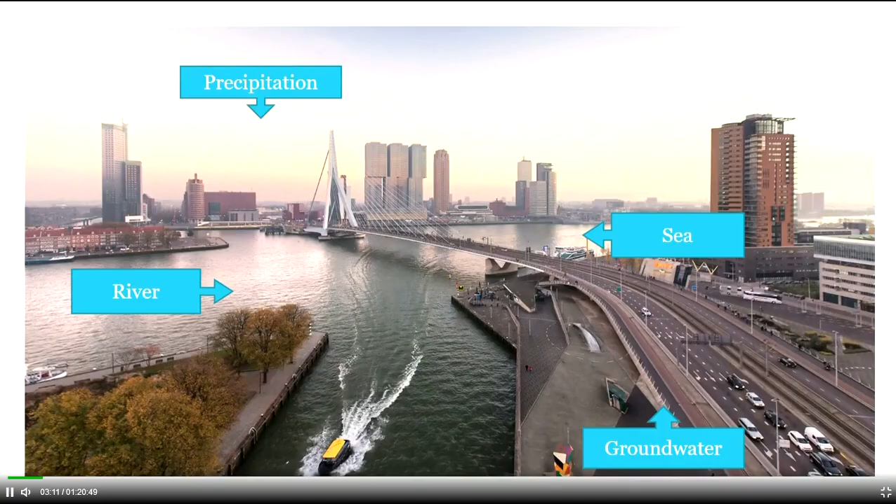Flooding in Rotterdam. Yes, we are a delta city. We live right next to the river, right next to the sea. So water is a real challenge for us as a city because water comes from four sides. We have the river flowing to our city, and when snow starts to melt in other countries, the water will eventually flow through our city. So we see rising river levels, and even areas of the city that flood maybe once or twice a year. And the people like it so much living next to the water that they even accept things like that.

Then the sea - well, luckily we have a storm surge barrier in the west, the Maeslantkering. When that closes off, the city is totally protected from the sea, at least for now. Groundwater can be a challenge too, so low groundwater tables during periods of drought, and we have those old homes founded on wooden poles - those poles rot and the house will shift. Or higher groundwater tables when your basements will flood, and a lot of the basements in Rotterdam are transformed into bedrooms and kitchens.

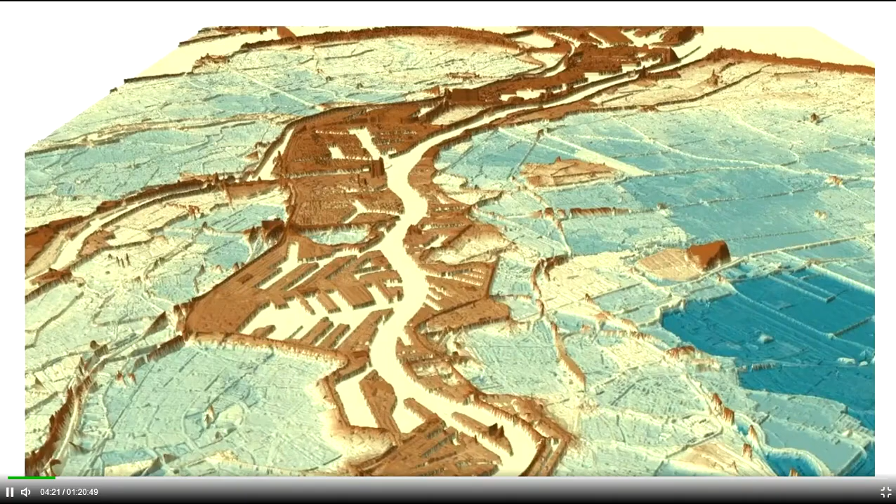You don't want that. Precipitation, rainfall, is a real challenge for our city. And it was already said this morning, 85% of our city is below sea level. So everything that's blue here is below the level of the river. We have quite a good drainage system and around 1,100 pumping stations to keep our city dry. But we see with climate change and high intensity rainfall that our sewage system cannot cope with that amount of water. So we have to do something to our city.

I already showed you this in the heat session - we used to be a water city, so there was quite a good surface water drainage system, but the city council decided to transform Rotterdam into a car city. Hence a lot of the former canals - this was actually a canal, called Goudse Singel, and Singel is the Dutch word for canal. From a heat perspective this is not good, but from a water perspective this is also not good. It's totally paved, every drop of water that falls here goes to our sewage system. The sewage system cannot cope with the water, hence water on the street.

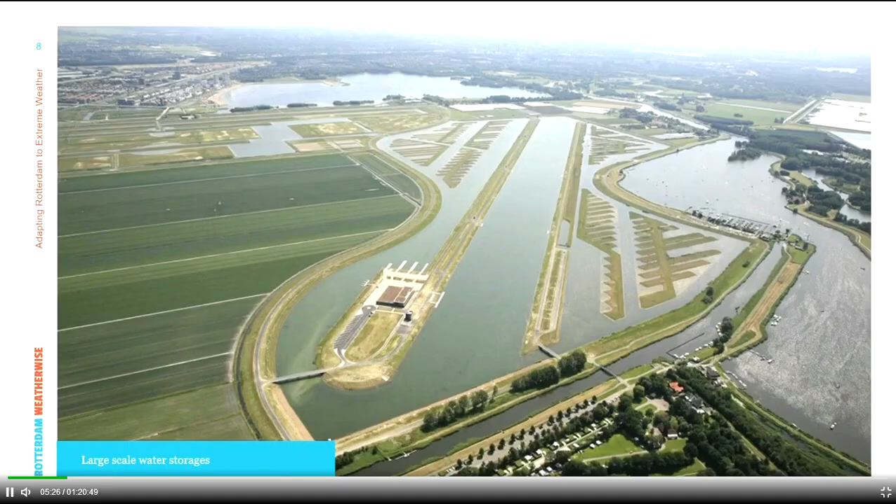So we have to work towards a climate adaptive city and really integrate climate adaptation into our urban planning. Let me give you some examples of that. It's about large-scale solutions - and this is problematic in a densely built city - large-scale solutions and multifunctionality. What you see here is a big water retention reservoir, but it also doubles up as an Olympic rowing track, so it can be used for rowing competitions.

And it actually helps in improving the retention capacity of our polder system, but it's outside the boundaries of the city of Rotterdam. We don't have space to do things like this, so we invest as a city in solutions that help keep our city dry, even if it's outside the boundaries.

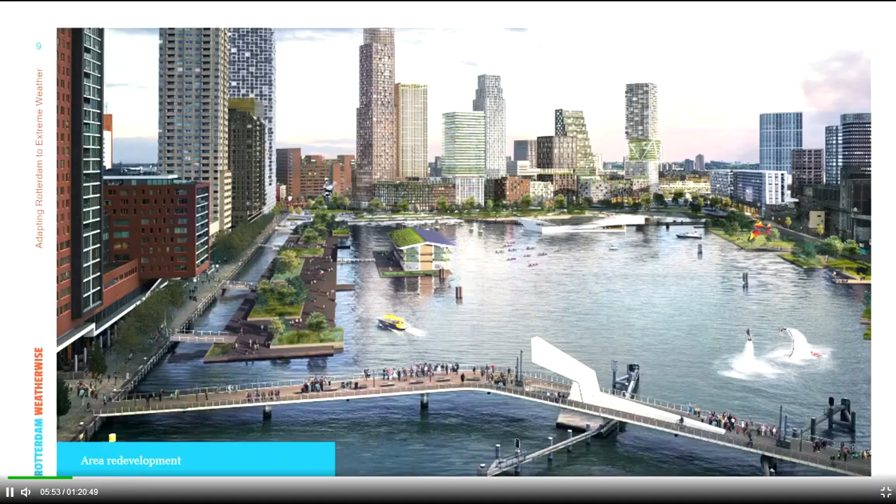Also, area redevelopments. We have a lot of former port areas in the city, and the ports gradually moved towards the sea, leaving unused port areas. This is Rijnhaven, and in the middle is the floating office of the Global Center on Adaptation. It will be transformed into a tidal park, increasing the recreational value of the area. It's also quite interesting for real estate developers to develop there, but it also helps in flood-proofing the city, so it has this multifunctionality in mind.

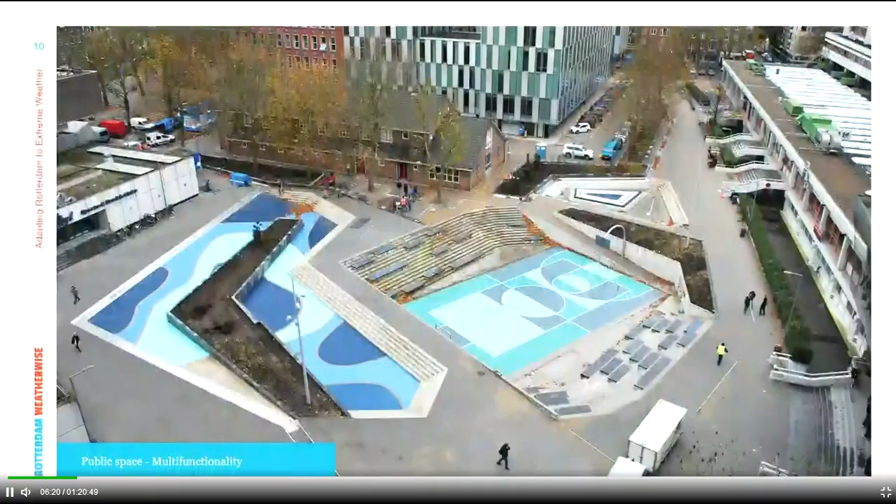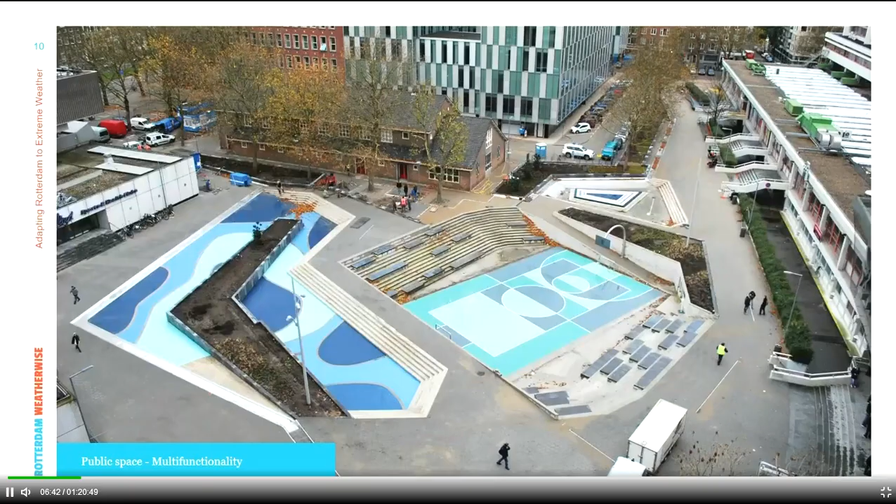And also on a small space, this is the water square. There was the first one, it's already 10 years old, but we have a lot of these all around our city. They all look completely different because we always design them together with the citizens. So they serve the purpose of water retention, and at the same time can be used for sports and theater. On this one, there's even a church that does services in the big reservoir on a sunny Sunday, but at the same time, 1.7 million liters of water can be stored here.

One thing we try to do is link in with everything that's happening in the city, and a big opportunity for us is sewage renewal. Rotterdam is built on sloppy soil. We have 2,400 kilometers of sewage pipe which keep the city dry. This is really the core of a robust system.

But the pipes, they just sink, so we have to renew them every 60 years. We renew 40 kilometers of sewage pipe every year, so we also open up 40 kilometers of roads every year.

So there's a huge opportunity to do a lot of this in the city in the next few years. And obviously you cannot give up every road, so it's always looking at what's possible here, but also inviting citizens in an early stage, before we even have a project, to think with us about what they like and what kind of solutions they want. So it's not the traditional way of the city knowing what's good for the citizens, but together the city, and maybe even the private sector and the citizens, know what's good for their streets.

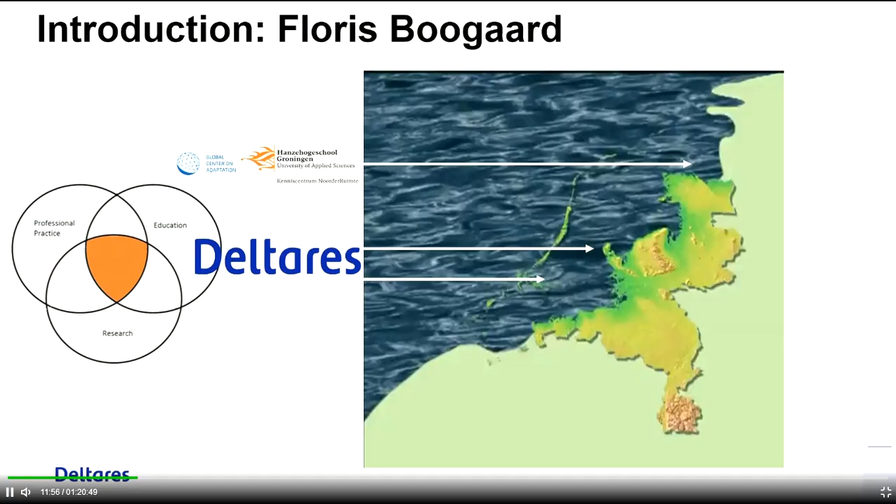I work at Deltares as a consultant, being a professor in Groningen, and also, one of the pictures that Johan showed, I also work as affiliated researcher at the Global Center on Adaptation, which is in Rotterdam and Groningen actually. Next slide. If the dikes would break, you probably know Netherlands is below sea level, I might have to move to Dubai, as you can see here. So water is a real focus in my work.

Next slide. What I want to talk to you about in this very short presentation is a strategy for integral flooding solutions. And of course, we have a lot of challenges, we have a lot of solutions that we can share. I think a major strategy would be to analyze the problems and the solutions, form an ambition, and then as soon as possible come to action.

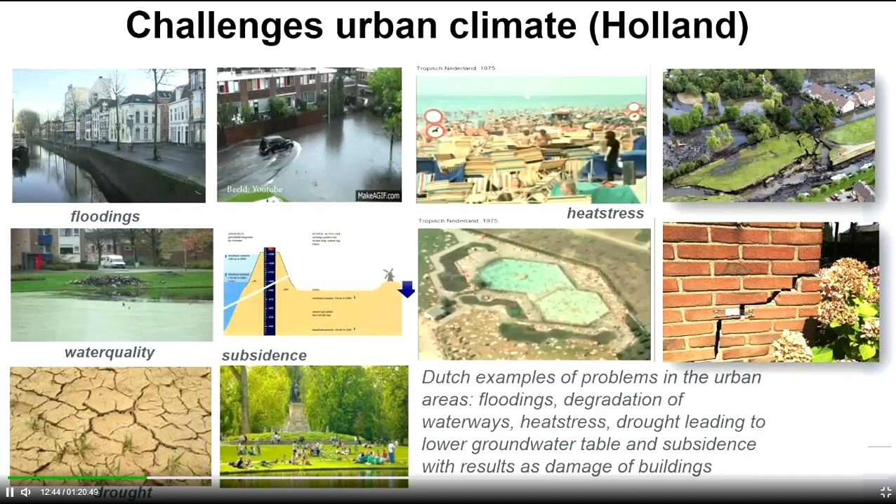Next slide. Just to show you some of the challenges that we face, Johan already named them, so I'll go quickly over them. Of course, it's about flooding in this section, but if you cope with floodings you will also do an integrated approach, tackling heat stress or drought or subsidence, being sinking cities, for example. It also has a very large effect on water quality, air quality, urbanization, more paved areas in the city that we have to solve. So next slide.

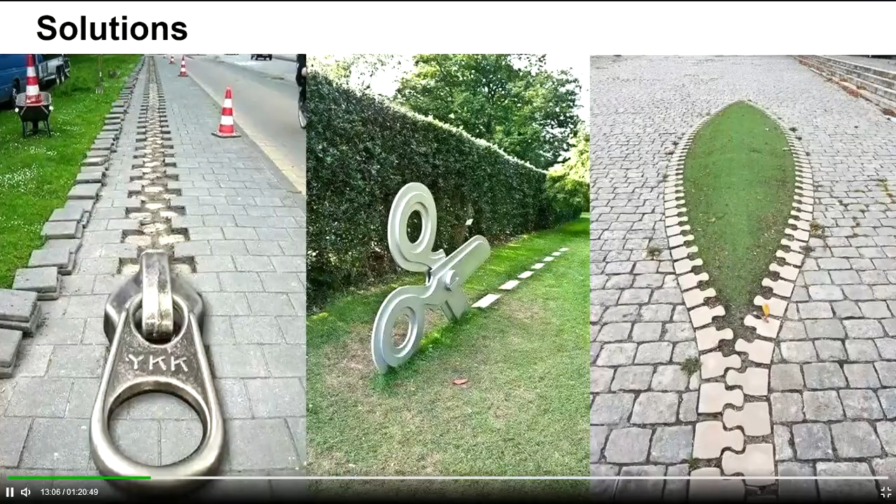I think these artists visualized well what we have to do. We have to open up the cities again and give more room for water where it can be stored and slowly infiltrate into the ground. So we tackle floodings, also drought, and heat stress in a lot of situations. Next slide.

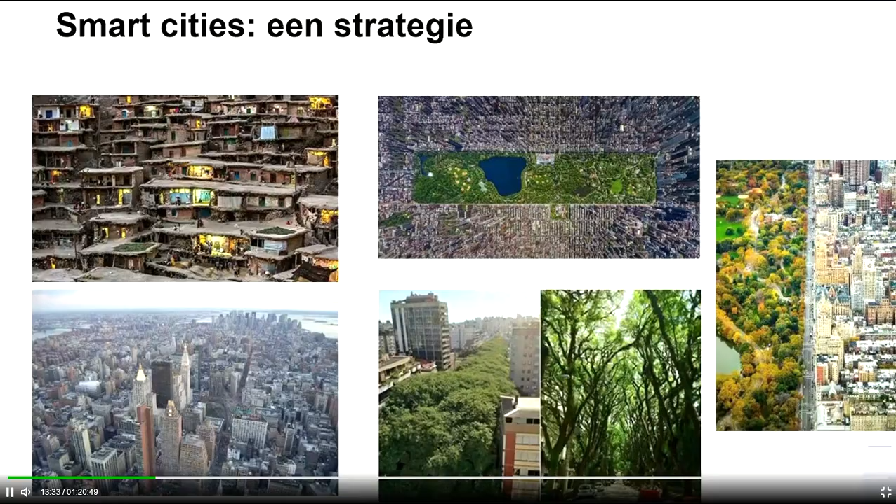You will see that cities were not planned that smart in the old days, as Johan referred to as well. We tend to give green less space, or put it in just one space, as you can see here. Gray and green are really separated in this case. So one of the challenges is really to take an integrated approach and see how we combine them.

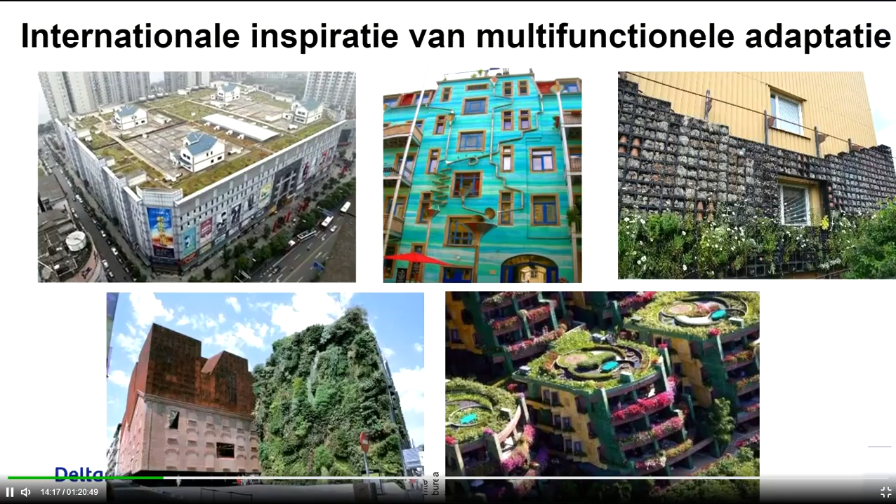Next slide. There are some great solutions all around the world, as you can see here. Rooftops in China, autarkic homes in Thailand that are really self-sustainable, a very nice green wall, one of the biggest in Europe, in Spain, for example. Maybe one of my favorites is the one in the middle: musical instruments in a building in Dresden. When it rains, it makes music, and every time it rains it makes a different symphony, so to say, and people go out in the rain and record the noise that it makes. So it should reach participation and stakeholders in this case as well.

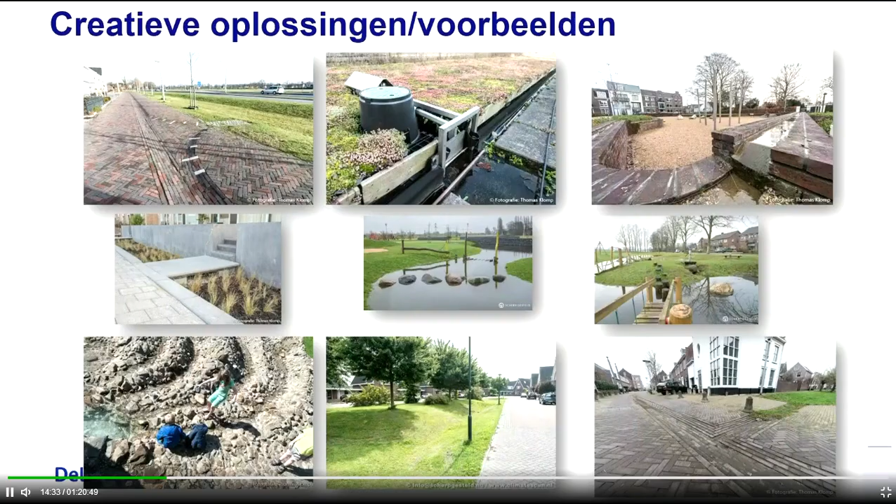Next slide. So there are a lot of solutions that you can find: swales, rain gardens, water squares, permeable pavement. Those are all small-scale solutions that you can implement in the urban area.

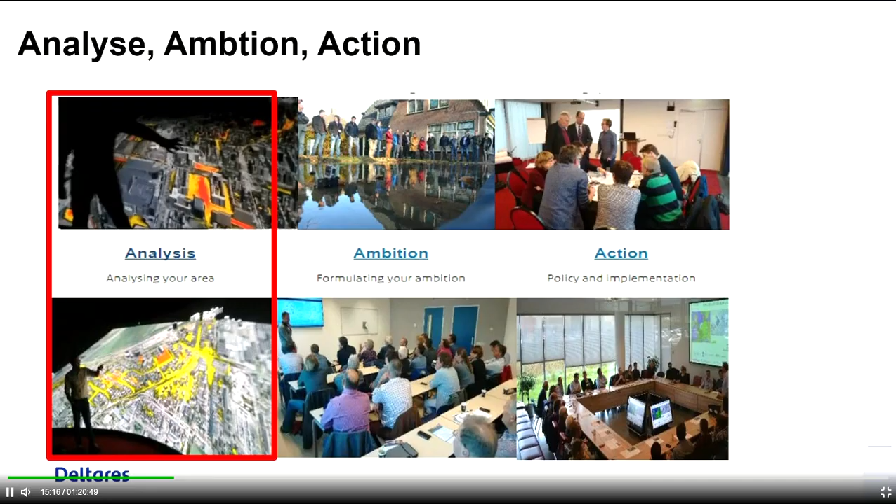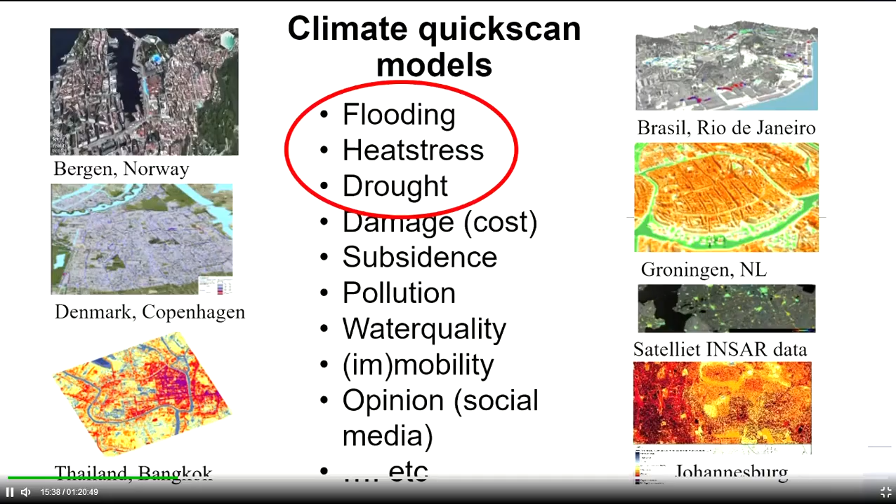I will show you in the next slide. You have an ambition, and then you also should go to action. Here's some climate quick scan models. It doesn't have to be exact, most people already know where the problems are.

It's not only technical, it's also about the opinion. Social media can be modeled as well, so you can see what the perception is of people and combine that in a technical structure. That's mostly an integrated approach.

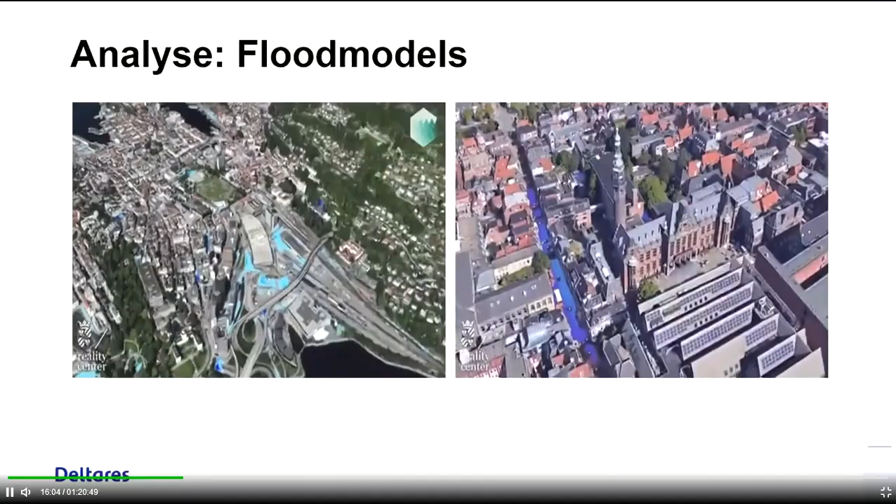Here are some 3D visualizations of how you can relate to people. You can fly through cities and see where the problems are, so they relate to the problem and are more willing to give a solution to that.

It's always good to give an example. Copenhagen is a well-known example. In 2011, there was 150 millimeters in 2 hours on that city, causing a billion of damage. It's quite a best management practice now, because they came to action quite soon.

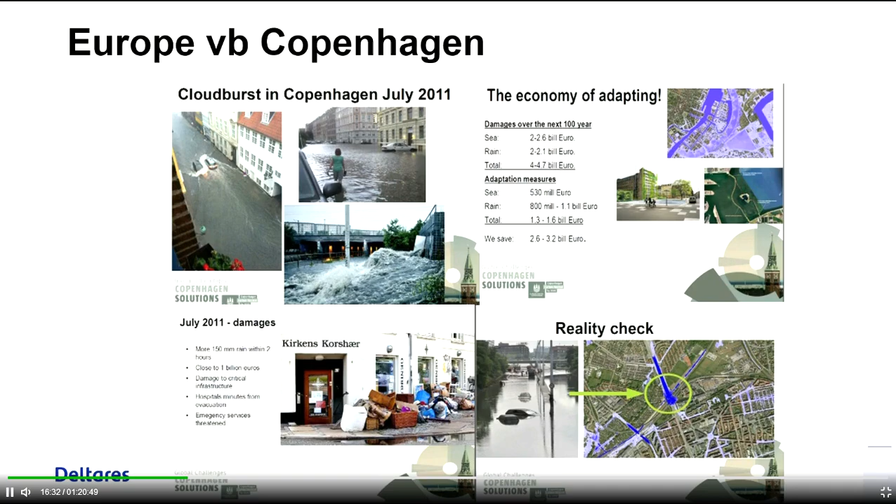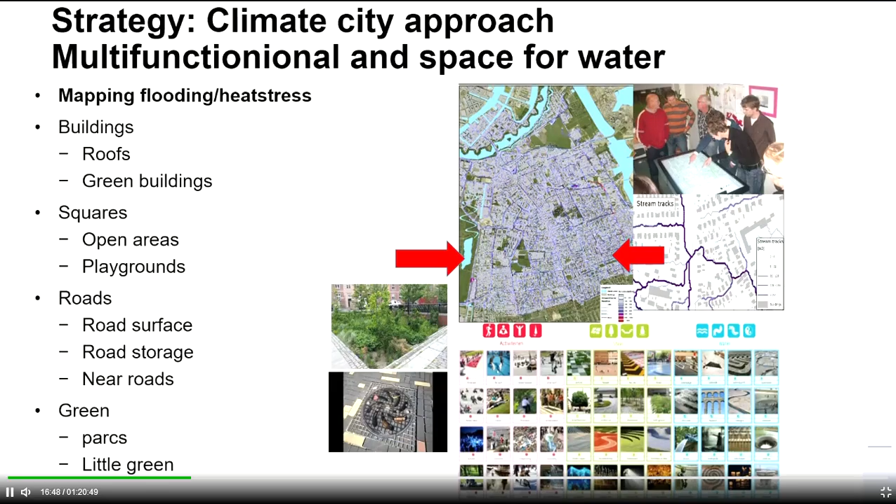I did some flood modeling there, as you could see the models before, and it's basically a puzzle to see where your buildings are, where's the green, where are the squares, where can you make water squares, as Johan was talking about, or other features to fit into the city. You can make it into a fun game, so to say.

There are a lot more solutions. Here's some things in Dutch text, because they're Dutch, so maybe it's an inspiration as well. It's really greening cities, and I collect them in a tool that I will show you later, and you can maybe use that.

It's very important to know that you can implement them, you can design, you see great pictures of it, but it also has to work in the long term. Maybe 60 years, as Johan was talking about, for roads, but some municipalities have 20 or 40-year cycles. It has to be functioning, have hydraulic capacity, but also people have to like it in the area.

All these guidelines and lessons learned from these projects you can find on adaptation platforms, and platforms are of course location specific. Here you see a lot of QR codes all around the world of platforms you could use to find information about what works, what doesn't work, the lessons learned I'm talking about.

Just to give you one example of that is ClimateScan. In this book, there are a lot of platforms you could use. Climatescan.org ticks a lot of boxes, so you can use it yourself to share your solutions, and also to find specific solutions in Rotterdam, or every city around the world.

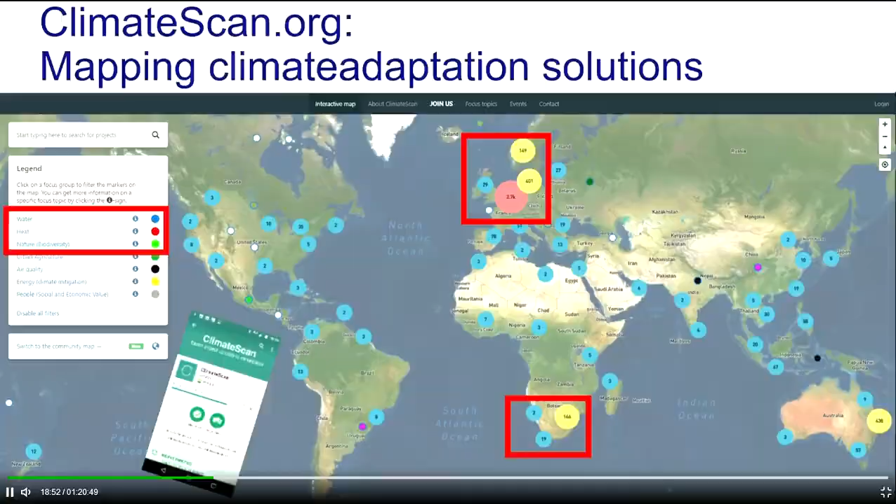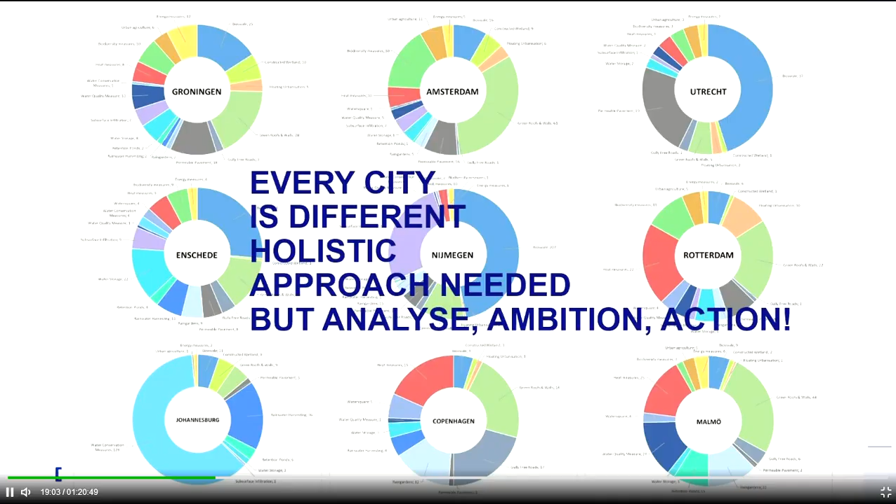With this, you can find the DNA of cities, because no city in the world is the same. So it needs a holistic approach, an integral flooding approach. In these pictures, also Rotterdam is there, but a lot of other cities like Johannesburg or Malmo or Copenhagen, you can see what the DNA of a city is.

Sometimes a green roof works, or sometimes more bioswales, or Wadi, as Johan called them, which is actually an Arabic name, so probably a lot of you are familiar with it. With the DNA of these cities, you can find your own strategy, which makes it difficult as well.

If you follow the strategy of analyzing, form your ambition, see what kind of cost, governance, or space you have to implement these measures, and then come directly to action and learn from it back, as you saw in those tools. So basically that's my message.

I hope this has been helpful, that you can use the tools, that you can share that knowledge. I hope that Deltares could help you out with all the challenges that we have around the world. Thank you so much.

Thank you, Professor Floris. Indeed, it's nice to learn how we can, as countries, learn from each other, how each country deals with the flooding. So it's a good presentation.

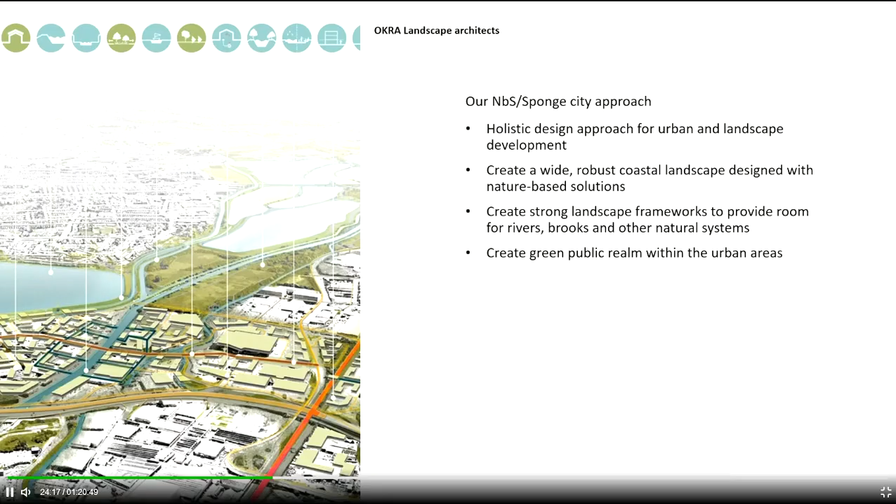Then gradually we started working on the green and blue structure, defining it with typologies, so the blue typologies could also be part of the green areas, but also linked to the urban areas—so that if you provide urban spaces, they are connected to the water system, and the sponge works not just in the urban area, but in the green areas as well.

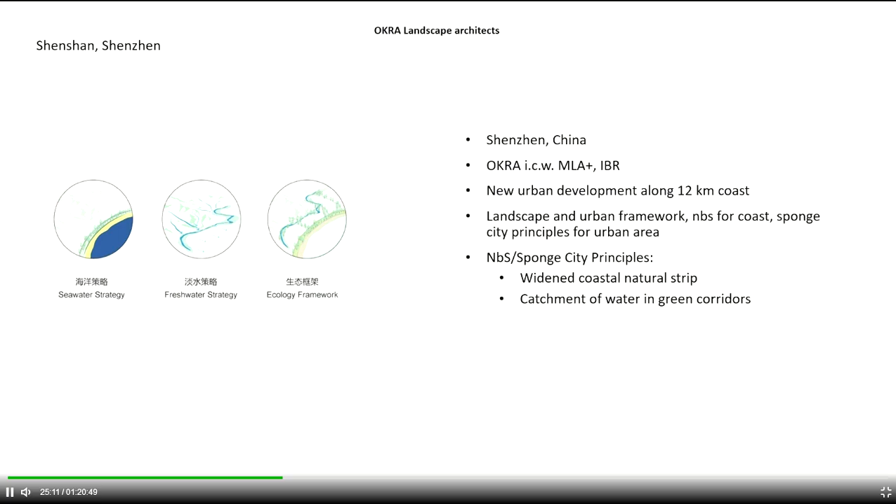For the coast, it was important to create this robust landscape that is so strong that maybe sometimes it can lose some of its dimension, and sometimes it can gain extra space, because the sea also sometimes gives instead of taking. It should also provide room for ecology and recreation, so it becomes multifunctional.

The wider you make it, the stronger and more robust it will be, but also the more meaning it gives to people. So that was the first asset, which creates various cities—a pearl necklace of cities instead of just one big city along the water. Here you can see landscape and urbanity are integrated, bringing a new future for cities.

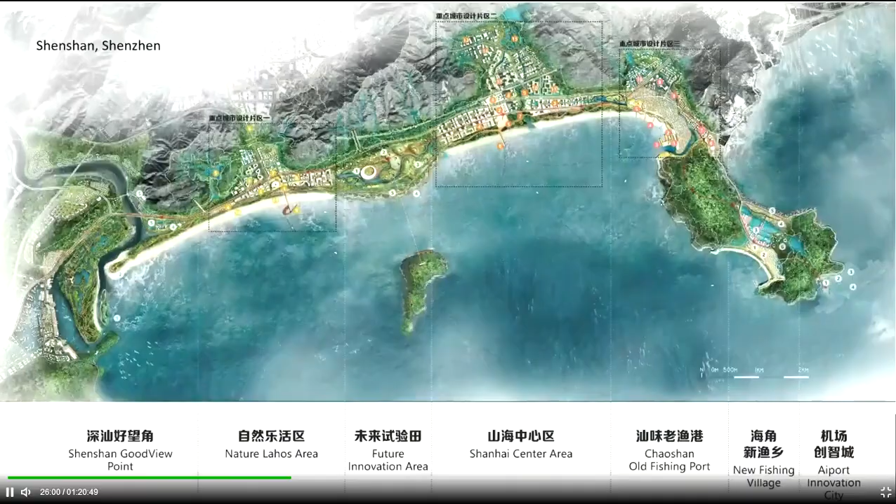The next project that I would like to show is the London project. We're now moving to London—Meridian Water.

That's one of the largest building locations in London along the River Lee, which is a side river of the River Thames, the most well-known river in London, of course.

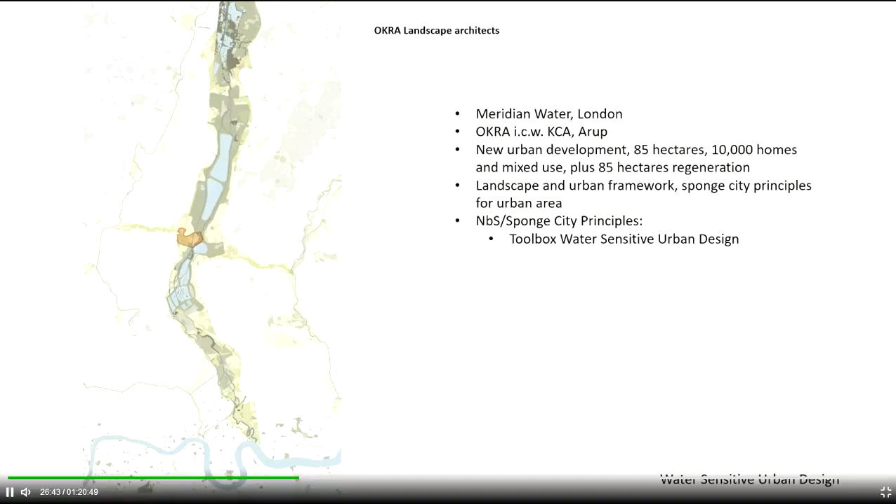And since the city is actually expanding, they are in need of creating a lot of housing. In our view, you should combine green with housing. So the number of housing is very high, but you should still create for sponge city principles and create what we call a toolbox of water-sensitive design.

That's crucial, we think, to tackle the new needs for the city. In fact, the city is also changing since they created Crossrail, which is a super infrastructure rail system. These locations at the outskirts of the city become closer to the city and will be there in 15 minutes from the city center.

And again, we say, start a holistic approach and define the tools for water catchment, water storage, reuse of water, and water in public realm prior to urbanization. And of course, there was the urbanization program of 10,000 homes on 85 hectares. There was also the program of creating a better space for residential areas adjacent to it.

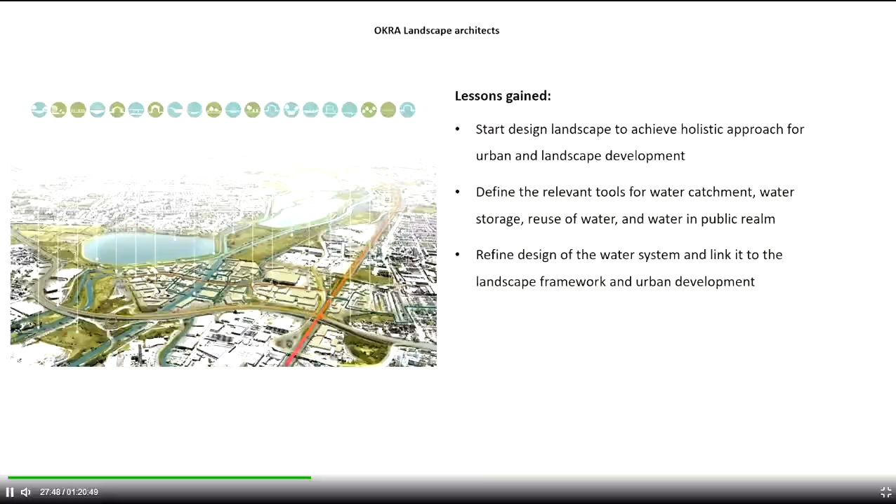But we said, well, please start with the green. And they accepted this proposal and said, okay, yes, we're going to link it to landscape framework and urban development. To do so, we have defined some tools, and you could say that if you provide tools, you can have them in 4 categories.

The first one is, please do something upstream. If you capture the water problem upstream, you prevent the area from flooding if there's a problem on the higher parts of the river. Then secondly, you need to provide a good area that you're not causing problems downstream.

So within the urban area, you should have several tools to capture the water, to store it, to filter it, and bring it in small doses to the river.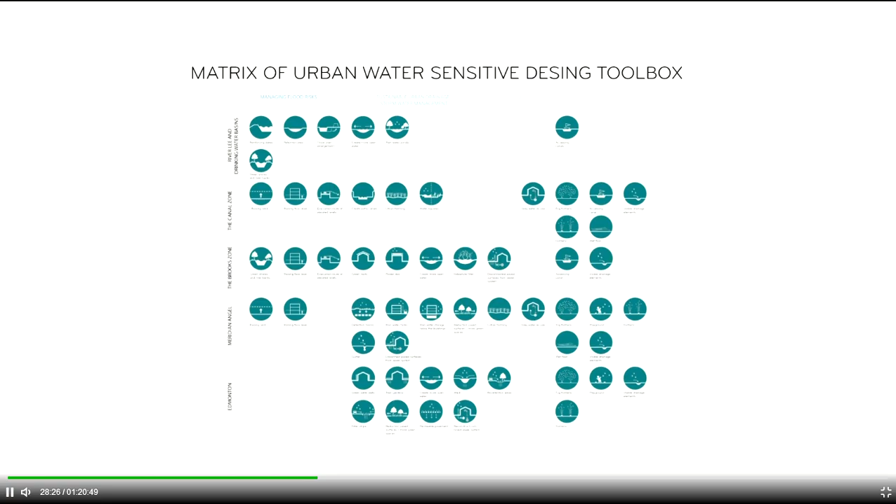The third category is thinking about recycling and water quality. We are of course always thinking about quantities, but in urban areas quality is as important as quantity. If there's polluted water, it affects the groundwater table, and in all metropolitan areas, water supply for drinking water is already at stake, and if you don't do the right things, it's also a bit in danger.

And the last category, I would also say, make water visible in the urban areas. So make it a pleasure.

So we designed some sections and showed how these tools could be applied in a design way. Otherwise, it becomes technical. And of course, technically, you can solve everything. But if you want to have people's awareness, you should design it as well.

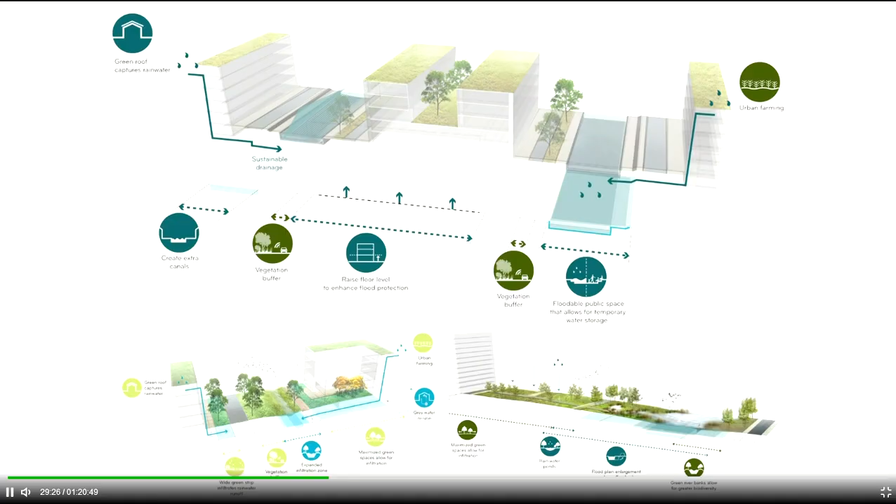So some more pictures of how that works are the next ones. And we have worked on the first area. This is a development area that is actually the starting development.

We said also, even in phasing, you can do this. So if you start developing, maybe first you should make green nurseries for trees, and maybe you should create already the green structure prior to building.

The last project here again shows some images of how that works on the small scale, and how the tools are connected to the map.

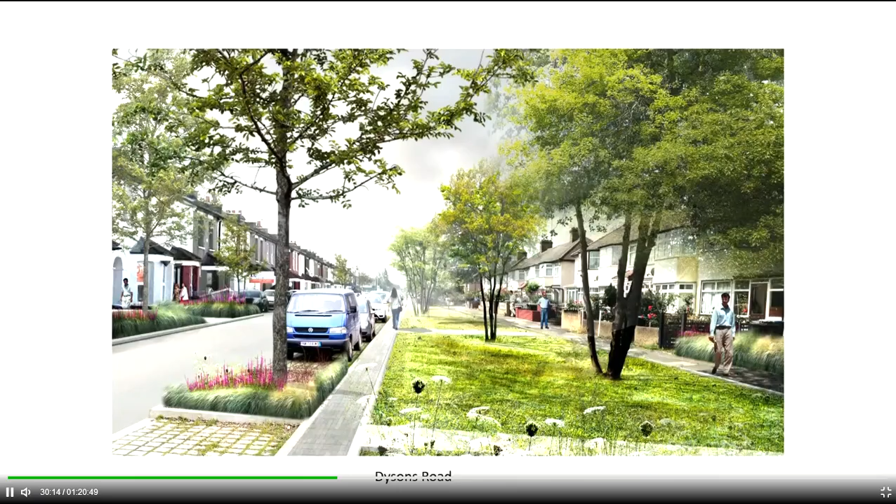You could see that it gradually works down to the small scales, and in the end you see this bioswale in the neighborhood, in a residential area.

But it all comes together to work with the big scale and the smaller scale, starting from the green framework and then gradually bringing it down to the human scale, and in the end, the eye-level perspective, so that people living there can understand what we mean with all these abstract tools and diagrams.

Yeah, the last project I would bring forward is a project in the Netherlands, Kustwerk Katwijk. It is about sea defense and coastal town economy.

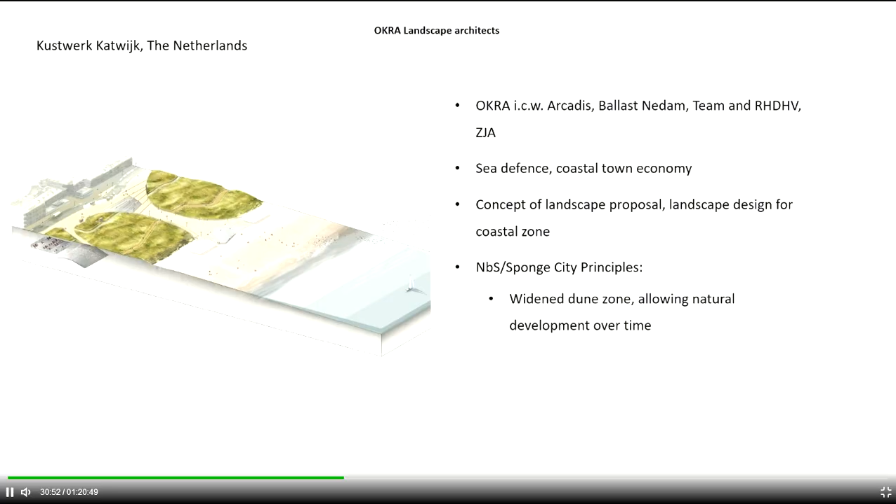In fact, what we can learn from this one is that, again, a holistic approach is required. Before we started here, the engineering solution was at the table, and the engineer said, you can make a big dike in front of the coastal town, and then it will be protected.

Of course it will be protected, but all the inhabitants were really angry. They were upset because the coastal town was always connected to the sea. So in fact, the government wanted to provide something good for the people, but people said, well, we want to experience that we live by the sea. And that social part was actually at stake.

So we said, yes, we can make a holistic solution, but then we should enlarge the problem a little bit more. Not only the coastal problem, but also the urban problem, the parking problem, and other items that were at stake in the urban area.

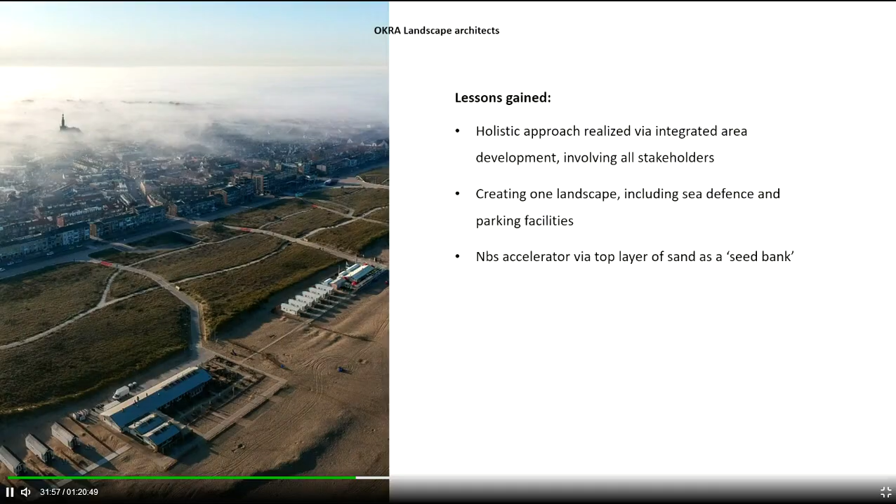Creating this holistic approach meant that we said, well, we can make large dunes instead of only having the dike, and that might be as strong as possible. Then the engineers were calculating, and we can thank them, the Dutch engineers, they really do great work. They said, well, yes, it can work.

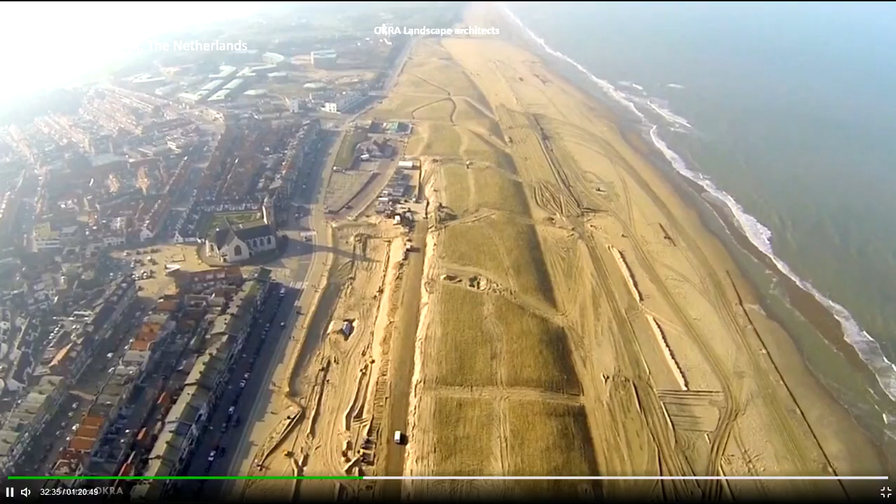In fact, here you can see an image that we created a parking facility as well. So within the sea defense, a special area was in a dike, and you see here the building pit for a parking garage. So gradually we made this landscape, which was already robust for coastal defense, but also for finding the solutions for the parking problem, so that the boulevard became better and the city became better connected.

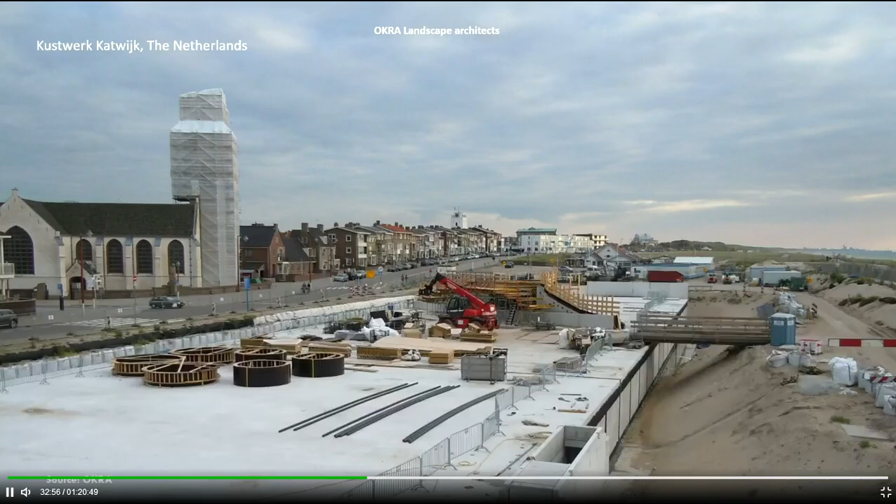Meanwhile, as you see there during construction, these were, of course, technical works, but we had to persevere. And the good thing about this, the lesson you can take from it, is that everyone was involved. So it was the national government, the provincial government, the water boards, the people from the town. But it was also the engineers. We, as landscape architects, the architects were involved. So it was a collaboration.

And if you want to achieve this, I think you should work all together on this water management, starting from, let's say, what do we want to achieve? How can we create a kind of interesting dream landscape that is our new city, that creates our perspective on the better world, and that really is dynamic and ready for the future?

Some more images you can see here on the photographs, that in the end, after a long period of working, it was realized. And if you walk here, you will never experience that there is just a dike underneath, or that there is a parking garage underneath. You think it's a dune landscape connected to the town. I think that's important, that perception. And gradually nature will take over, and that makes these nature-based solutions have a potential to create force for long periods.

Next, please. No more next.

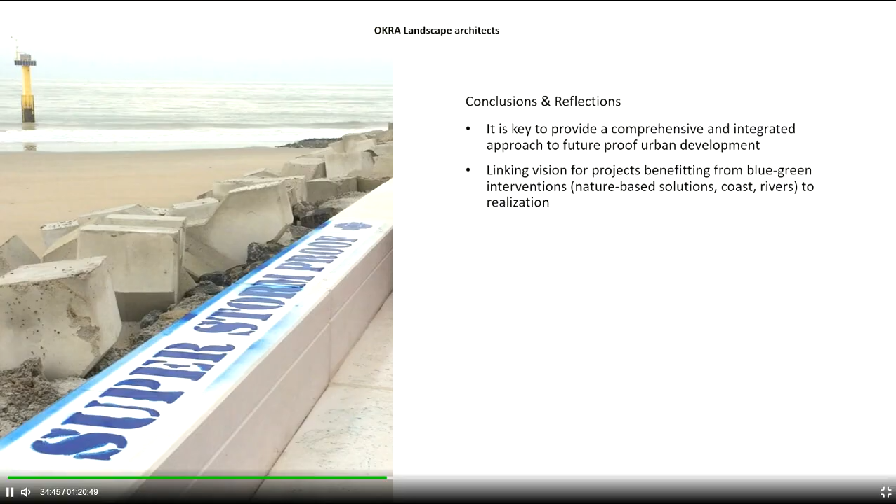It's a conclusion: the superstorm. The Dutch program on the coast was creating superstorm-proof coastal areas, but we will always have these challenges within the city and along the rivers and along the sea. I think it's key to have this comprehensive and integrated approach. Let's do it all together, and let's do it for people. Thank you.

Thank you, Mr. Martin, really an interesting presentation. I like how we should stand together to solve this problem. The government alone, it's not possible to solve this problem. So we should stand together, citizens, civilians, all the government, all the organizations in the country to solve this problem.

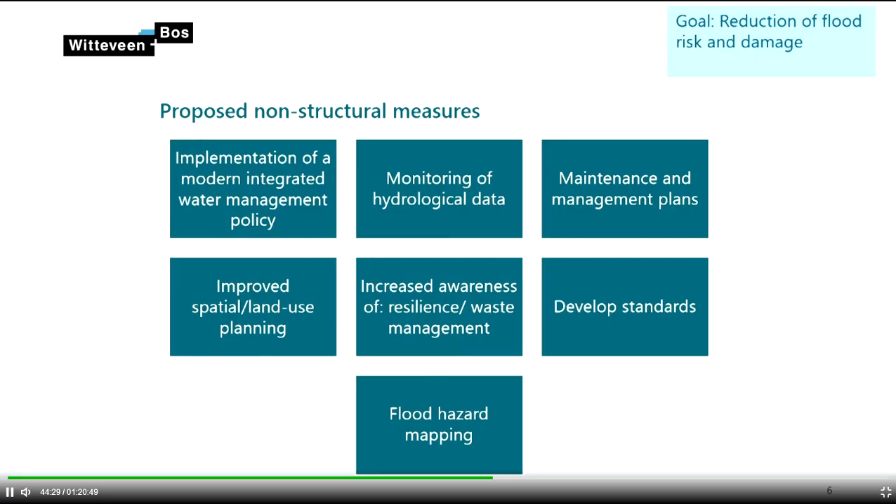Now we go forward in the sheets. I think the Mozambique one. Next one.

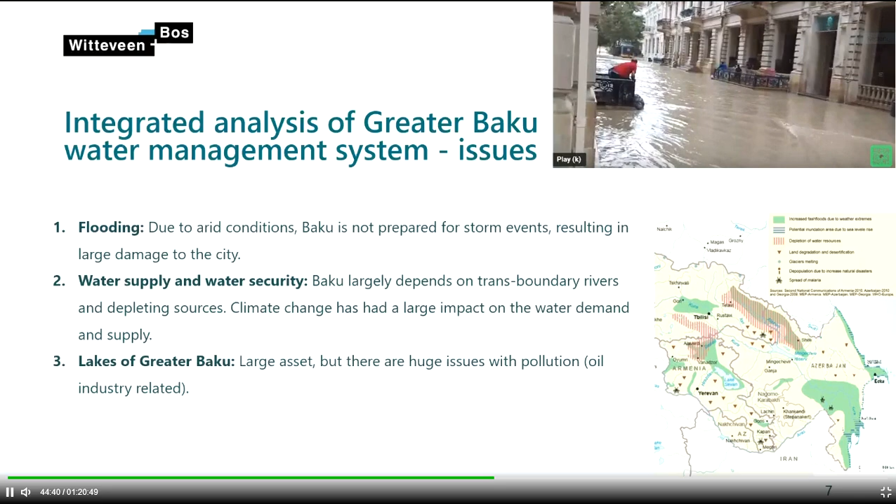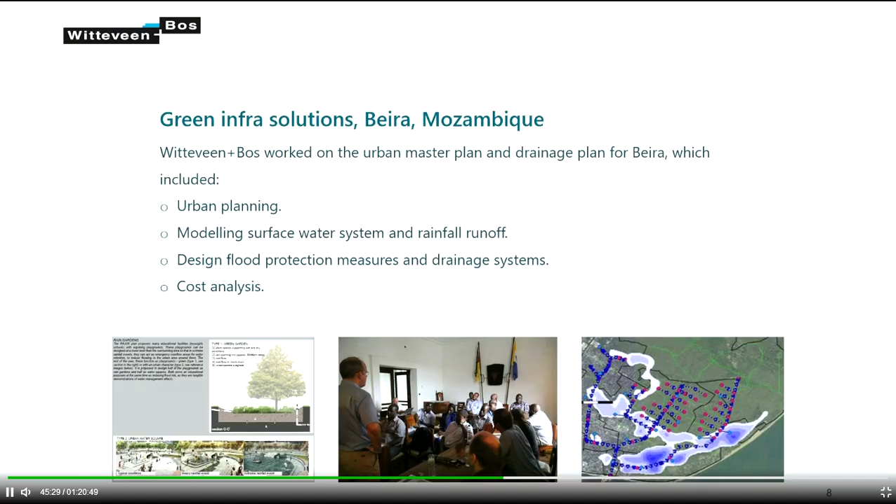Now I go to the next sheet. This one is from our colleagues in Belgium. We prepared the water plan for the city of Antwerp.

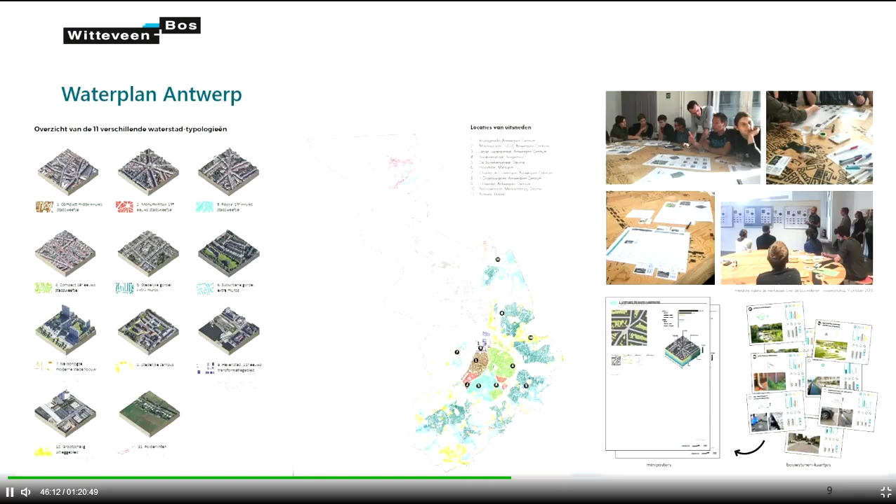And going to the next slide, maybe. This is also about Antwerp, and we go to the next one.

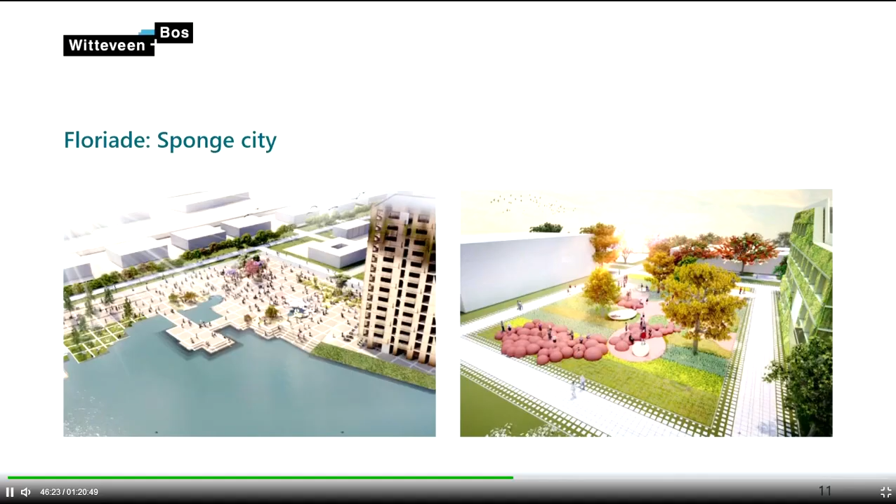This is the Floriade in the city of Almere in the Netherlands. The Floriade is a ten-yearly exhibition in the Netherlands. Originally, it was based on agricultural developments in the Netherlands. The theme for 2022 will be greening of the cities. After the exhibition, the area will be transformed to a residential area.

What I want to show here is the water retention at a local level, on the plots. The purpose is to reduce the discharge to the local stormwater system and at the same time save water for a dry period, because it will be a quite green area. The goal is to keep the existing trees where possible. For all developers in the area, it's mandatory to have minimum water storage at a plot level.

They are free to choose how to reach it, but the options include, for example, bioswales, water retention on the roofs, or the implementation of water tanks.

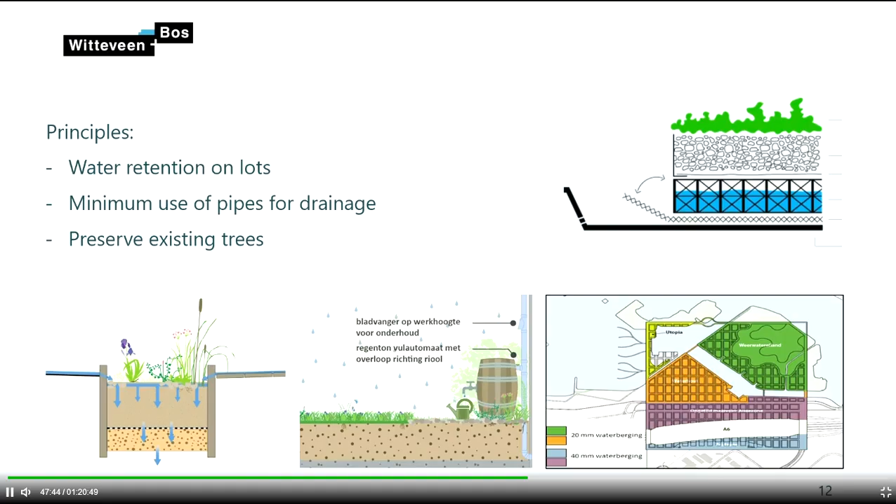And at last, I want to summarize this presentation with the lessons we learned in our projects. First, what we learned is that in most cases, single-purpose measures to deal with local flooding are not cost-effective, and we have much more challenges in the cities. Therefore, we propose a multi-purpose approach to deal with the challenges in urban areas.

The use of sustainable design principles helps to address all themes that have to focus on future-proof, resilient design. In this approach, stakeholder involvement, including private landowners, is essential. These sustainable design principles can be applied to all kinds of projects, not only urban flooding. When you look at the slide, you see a link to a video where you can find more information. That's my short introduction. Thank you for your attention, and goodbye.

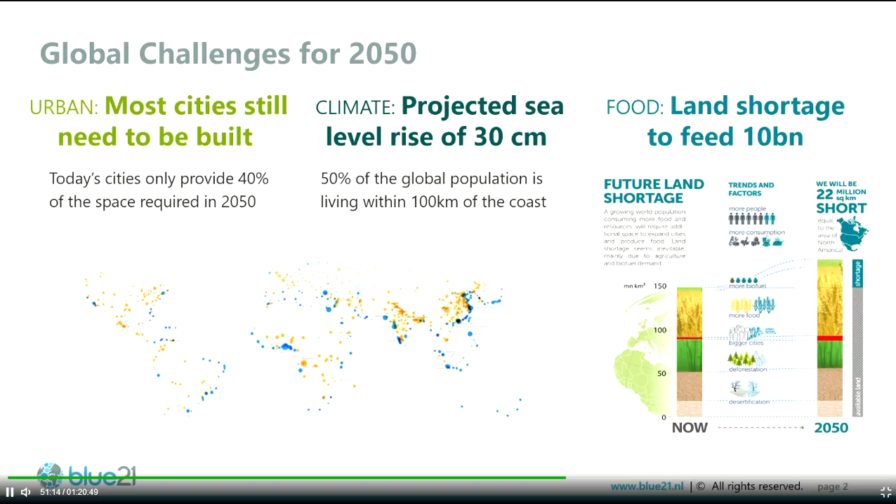If you look at most cities now, they resort to the most conventional way of creating space, which is land reclamation. You could see very ambitious land reclamation projects in Denmark or in Hong Kong, as well as other cities across the world.

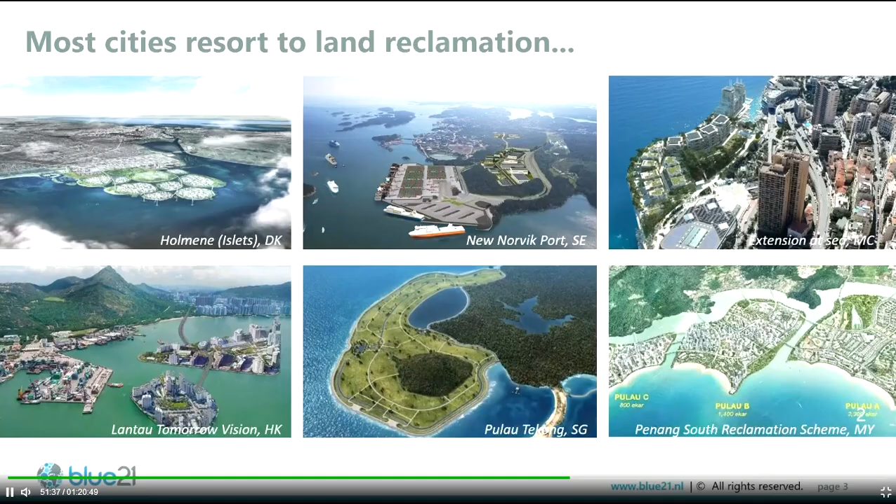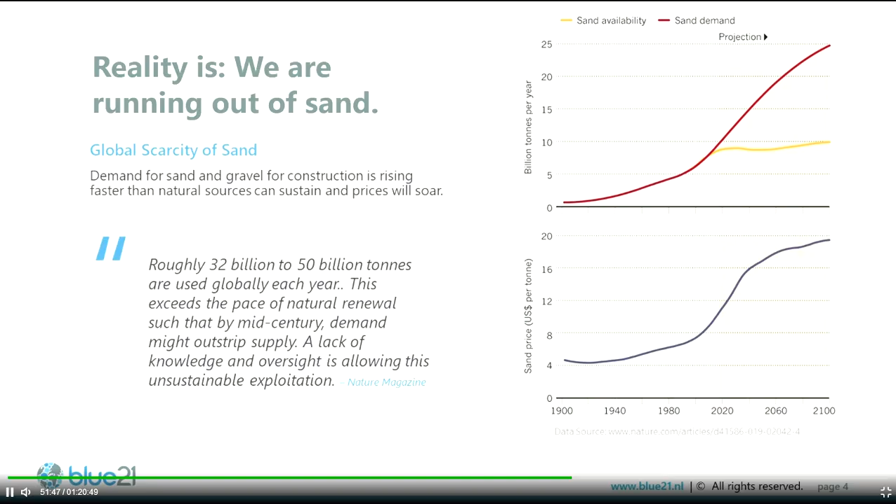But the reality is, we are running out of sand. The demand for sand and gravel for construction is rising so much faster than natural sources can sustain, and the prices will only soar. Land reclamation is in fact not the only solution to create extra space.

At Blue 21, we have been investigating creating new space on the water. We could create space for food production, energy production, and extra space for living. We could capture the nutrients discharged by cities nowadays and reutilize those nutrients into food and energy production, closing the loop and creating a circular economy.

So what is floating development? Floating development usually consists of two parts. There's the superstructure, buildings on top or other functions for living, recreational purposes, or for logistics, food and energy production. And there's also the substructure or the floaters, usually built with steel, concrete, amongst other materials. This whole structure is usually moored to the bottom of a water body or fixed to a quay wall so the whole structure doesn't float away.

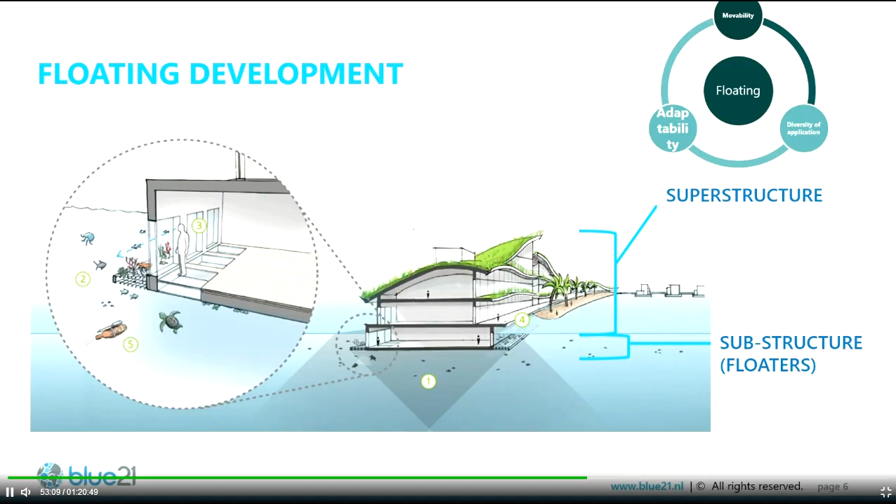With floating, it's adaptive to changing water levels. You can move it and create a more dynamic geography and adaptive urban planning. And you can introduce various functions on floating structures.

In many cases, floating is actually more beneficial and more cost efficient in comparison to land reclamation, especially in deeper waters or in areas where the ecosystems are more environmentally sensitive.

Some of you might wonder, what is she talking about? What is a floating development still? What is a floating city? What are floating projects? There are actually quite some building blocks out there already.

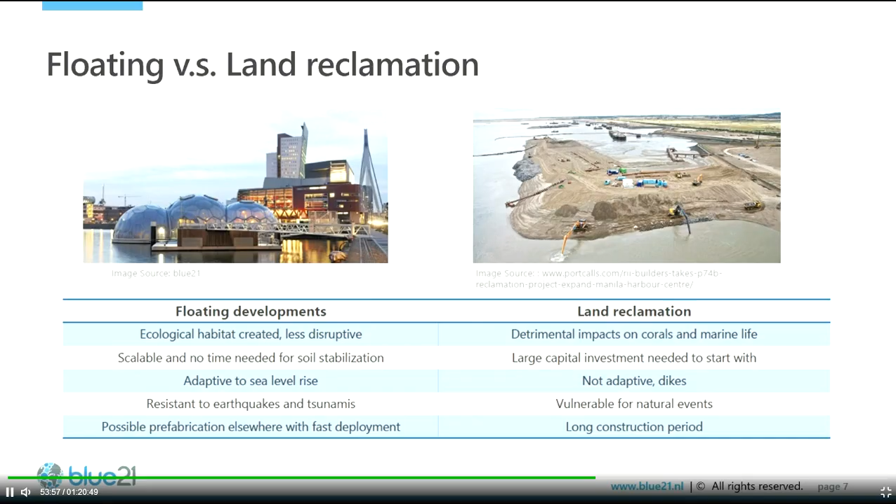In 2019 and 2020, UN Habitat organized two high-level discussions on sustainable floating city development as a viable solution to climate change, to providing affordable housing, etc. The main conclusion from these high-level discussions was that there are calls for action to actually design a floating city prototype and to organize a brain trust with increasing science on the knowledge to guide such an initiative.

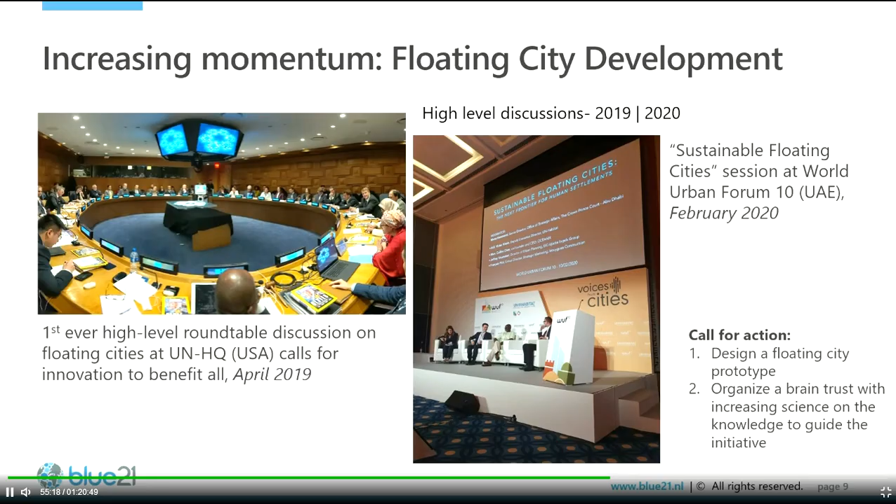Recently, this summer, two cities have stepped up to actually implement a floating city prototype development, that being Busan City in South Korea and also Singapore. So there's more and more momentum and interest and attention to such an alternative solution.

From our side at Blue 21, one of the largest floating area development projects that we are working on at the moment is in the Baltic region, in collaboration with Finest Bay Area Development, a Finnish company, and Shimizu Corporation, a Japanese company. Together with them, we are looking into providing resilient and future-proof large-scale floating area development in the Baltic area. This is also in association with the Tunnel Initiative, which aims to connect Helsinki and Tallinn with two tunnels.

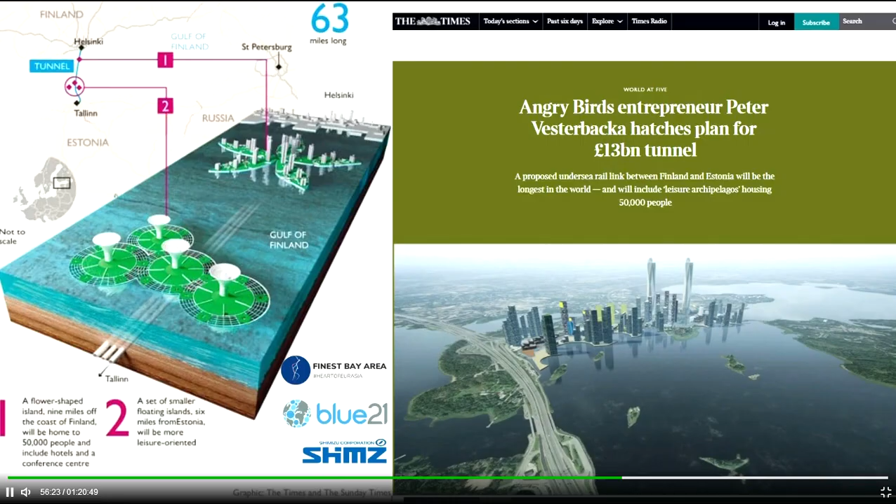So we are entering a new development phase with large-scale floating development. Floating is not something new anymore. In the past, you see fishermen or indigenous people living on water. More recently, you see more examples of sustainable floating districts being built and large floating structures. So we are entering a new phase and getting closer towards realization of a floating city.

And recently, we have also realized a floating solar project. And last year, we completed a research study on Space at Sea, providing sustainable and modular living space at sea for different functions, in collaboration with 16 other European partners.

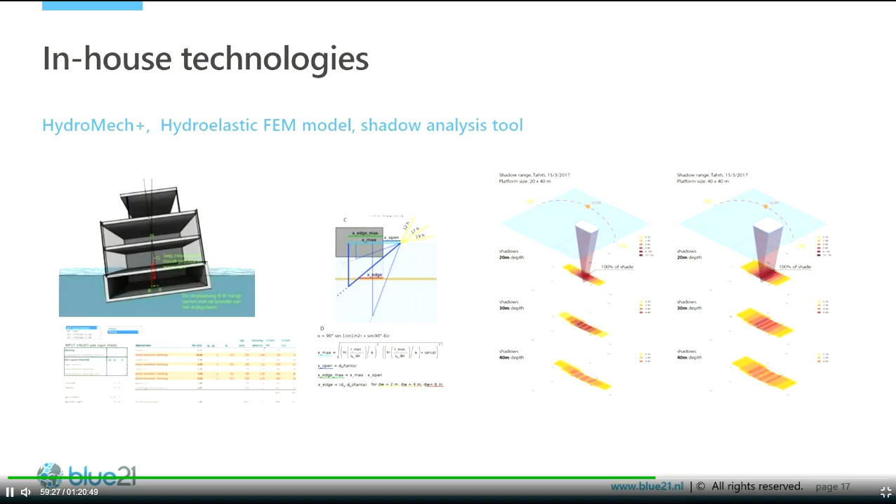For our in-house technologies: we conduct quite some hydrodynamic studies, using various tools to understand, for instance, the elastic behaviors of very large floating structures. We also analyze effects of shadows that could be produced from floating structures.

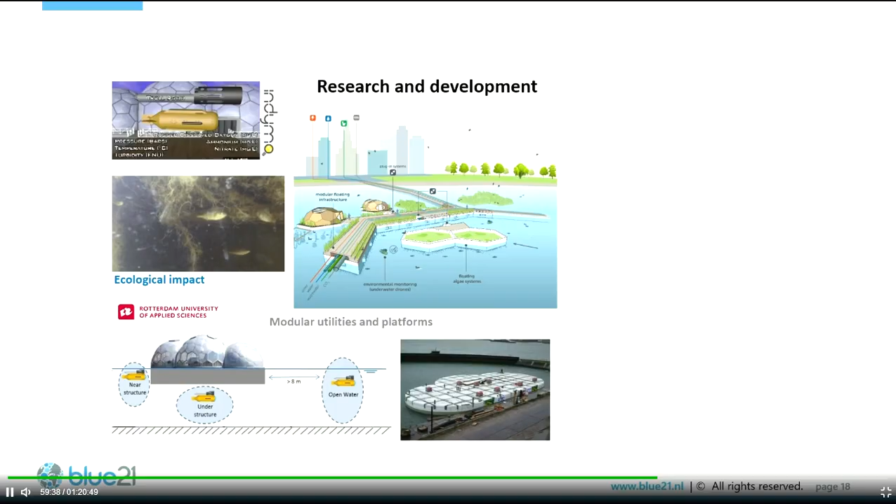These are some images of our internal R&D.

This is something else that we've been working on for quite some time, which is a floating city unit - a modular unit design that incorporates utilities connections, which could be easily introduced to different environments and be built such as Lego blocks.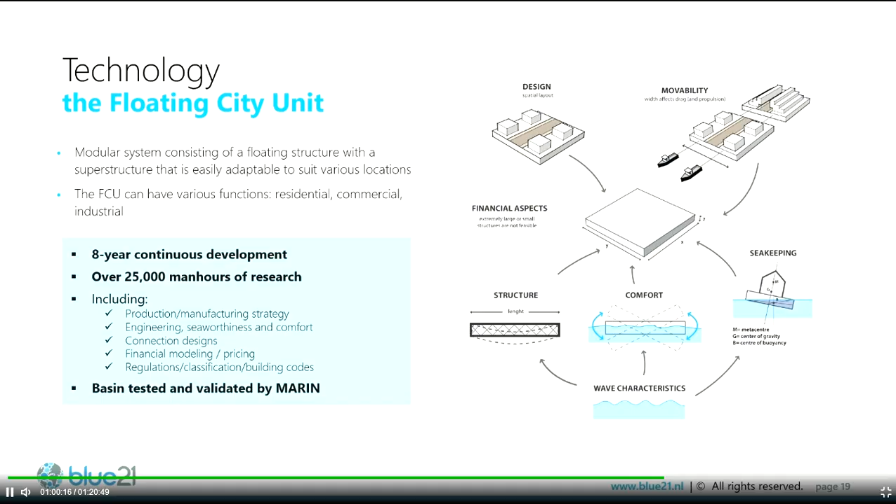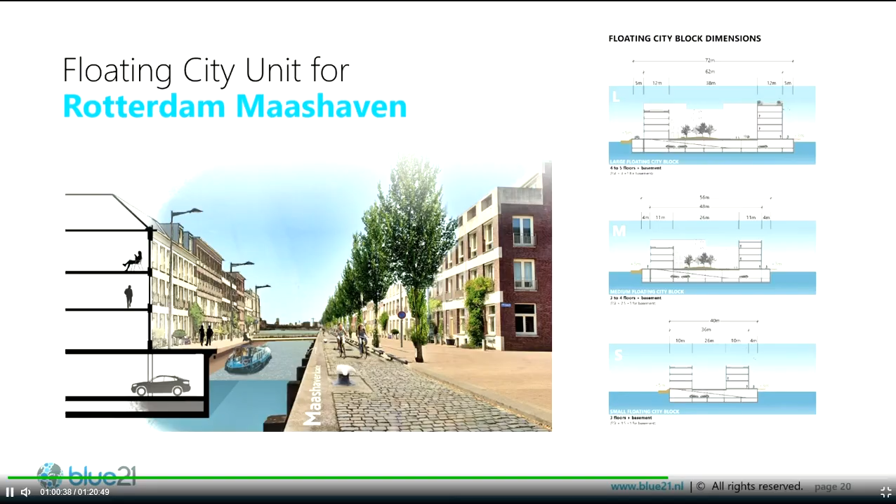This shows an application for an area, for instance in Rotterdam, Maashaven, where we could provide a larger floating district and a more adaptive living environment that could also have the potential of being towed elsewhere in the future to cater to other needs. For instance, some old port areas also need redevelopment, and floating could be a quite interesting solution for old port areas.

Floating has many functions and also benefits, and could contribute to achieving the UN Sustainable Development Goals.

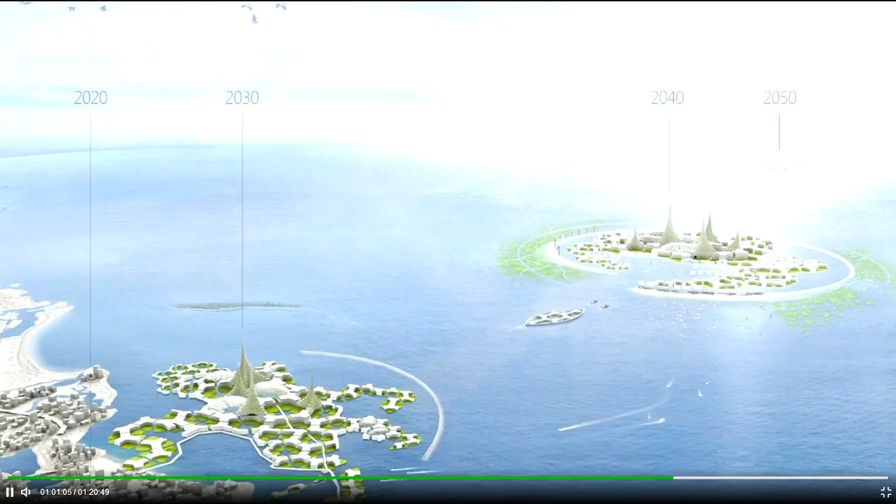This is the roadmap and our vision for the future towards the realization of a self-sufficient floating city. If you have more questions about floating, please feel free to visit our website or reach out. Thank you again for your attention.

Thank you, Vicky. Thank you for the amazing presentation. It's nice to see how in the coming years we will have limited space to build new houses, so now you have more research on building new houses in the sea with floating. Thank you for this presentation, and thank you for your attention, the audience. So now we will go to the Q&A. So our colleague Janet - well, Janet transformed into Robin, but that's okay.